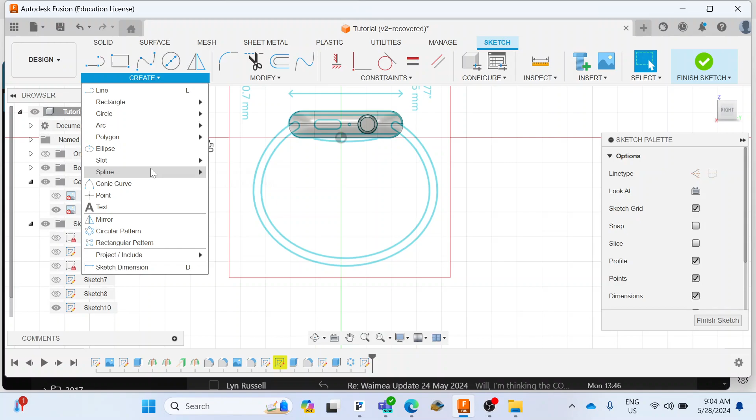The tool we're going to use for this one is the Spline tool. We're going to choose the Fit Point Spline. All you have to do is click points that fit the middle of the line the whole way along. Probably the more we do, the better it will fit.

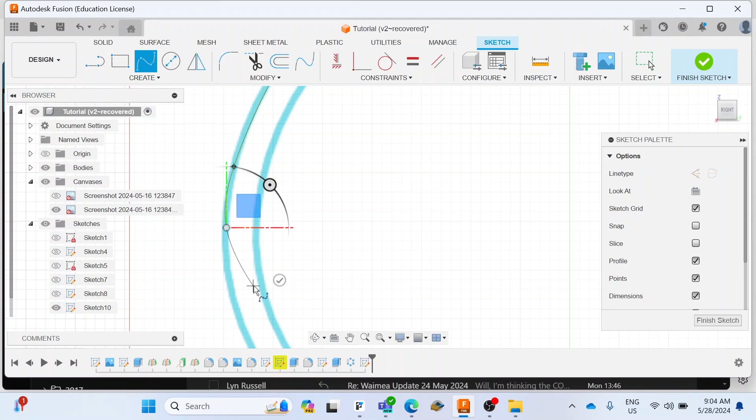Now to scroll across, I'm clicking the scroll wheel down. If you don't do enough points, you might find it doesn't fit the line very well, but this looks like it should work pretty well.

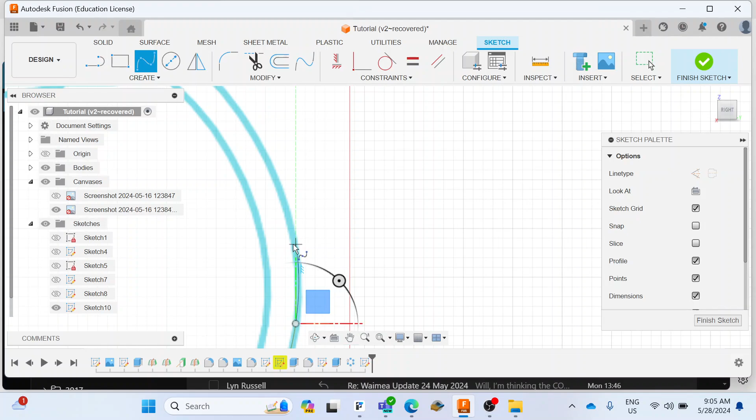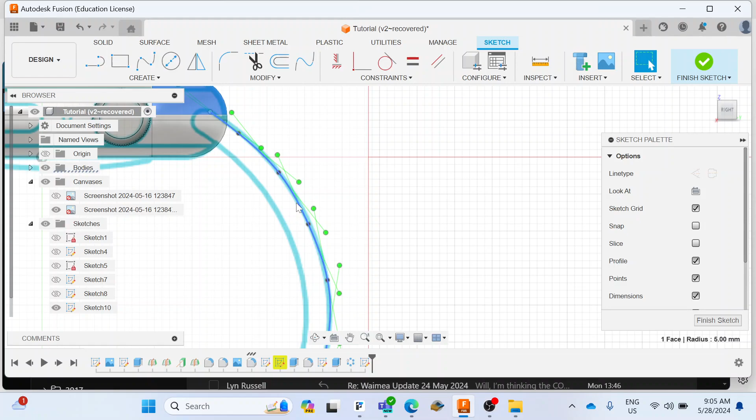Now to finish the spline, we right click and go OK. What we're going to try next is this line here. We're going to try the offset tool to see if we can make something smaller.

Sometimes the offset tool works beautifully. It may not work so well in this situation, but you can see we've created a pretty good line, pretty close to that. So we'll go offset, click on that line here, and we're going to drag it inwards rather than outwards, and that's done a pretty good job.

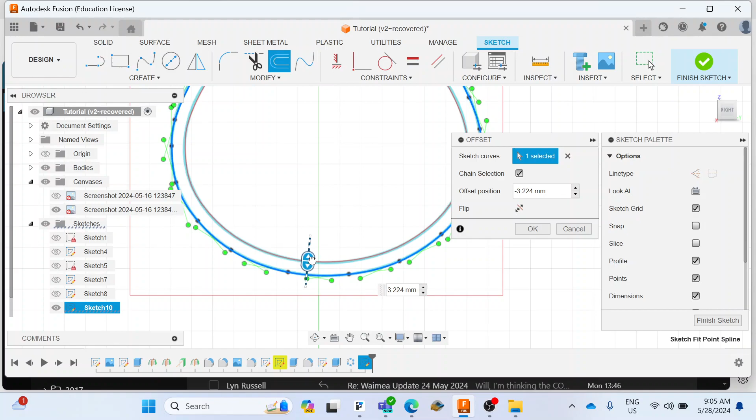Sometimes you might find it glitches out, but if that's the case, we just do that fit point spline again on the other side. So we'll go OK. Now what I want to do is just join the ends of the strap.

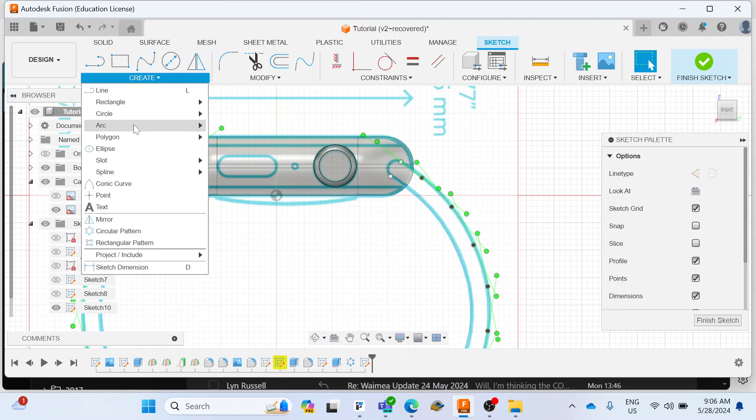For that one, I'm just going to create an arc, a 3-point arc. So just click the end of the arc, and then the other one. And that'll do. We'll do the same on the side.

What we might find here, this isn't too bad. To make sure this lines up perfectly, we can use the tangent line. So we'll just switch that off there to help visibility.

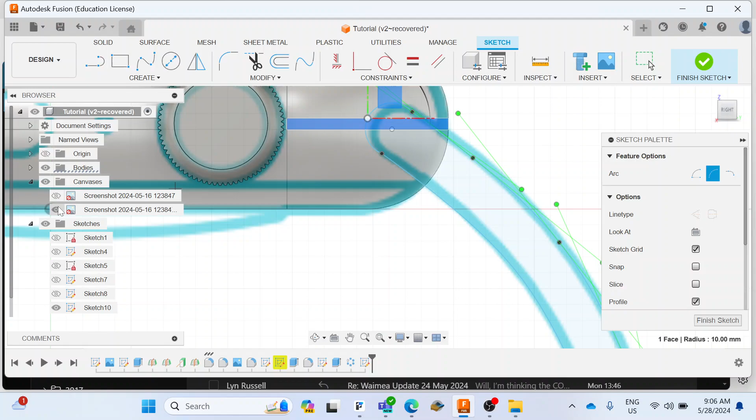So if we click tangent... that's not actually doing it. So maybe it's already tangented. Awesome. Okay, we'll go okay.

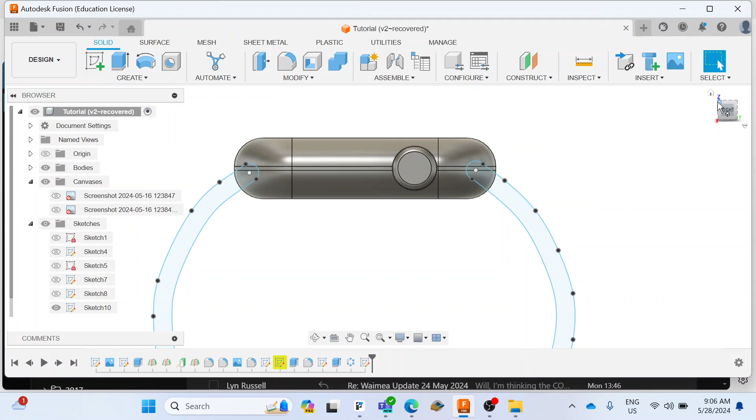So we'll finish our sketch. The next thing we're going to do is extrude that to make our strap 3D. You'll notice it's not in the right position, but that's not going to matter at all because we're going to end up trimming that sketch down.

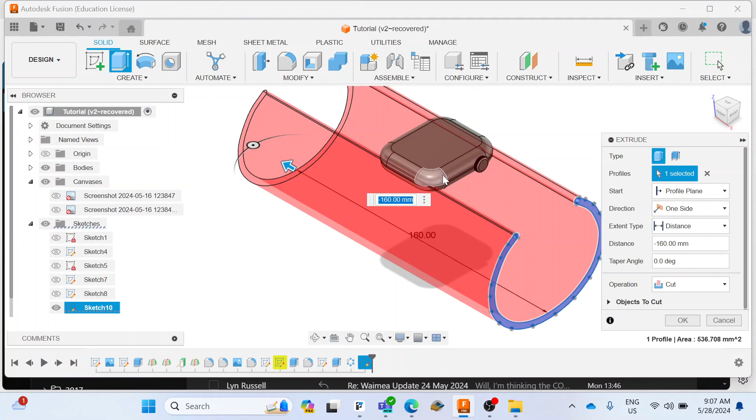So we'll extrude, and as long as it goes through the watch, that's fine. We don't want to make a cut at this point, although we will use that tool later on. So we're just going to go in here and go new body.

Then we go okay. So now when we look from the top, you can see that we've now got a strap that intersects both sides of the watch.

Now, if I turn this canvas on, you can see that actually the shape we want to cut out doesn't quite fit that design. So right back at the start of the project, we created those planes in the middle of the watch.

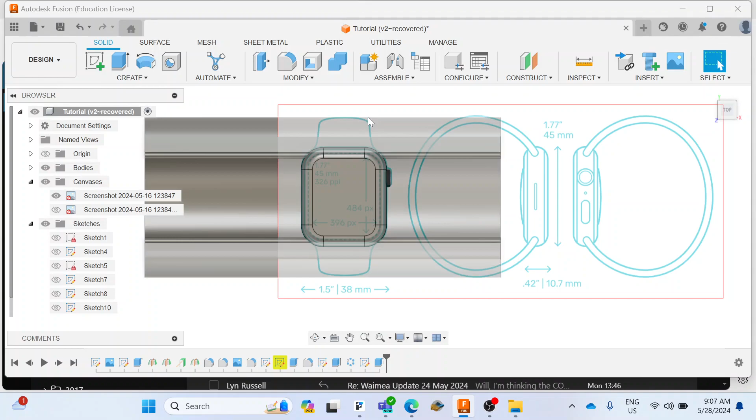So what I'm going to do is trim just a quarter of the strap off, and it should work beautifully for trimming off all of the strap. So what I'm going to do now is create a sketch on this plane.

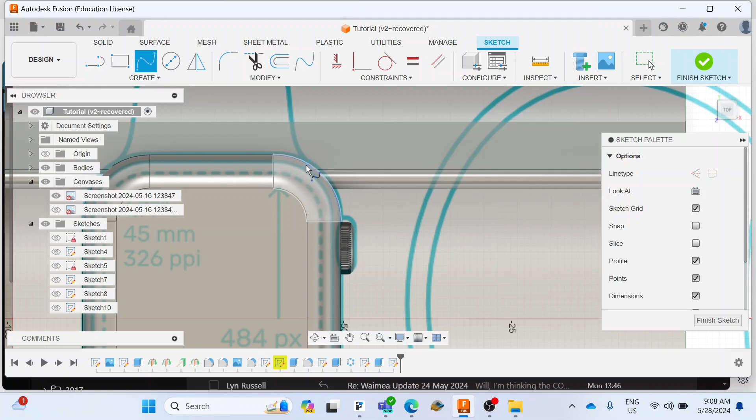And I think I'll use that fit spline tool again because it works so nicely. So spline, fit point spline. And I'm going to basically click here, and I might do a few more to make sure it fits the curve.

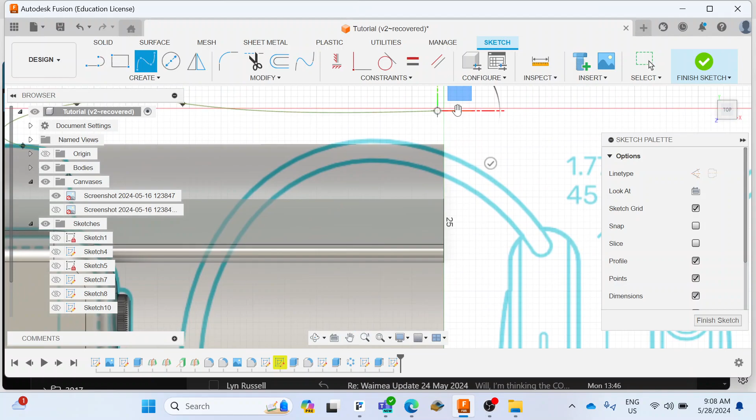Now I'm going to do a random thing, which is actually just me being lazy, but I think it will probably work okay. You'll notice I've gone just slightly over halfway in the watch, and we'll just go into just up to that surface there.

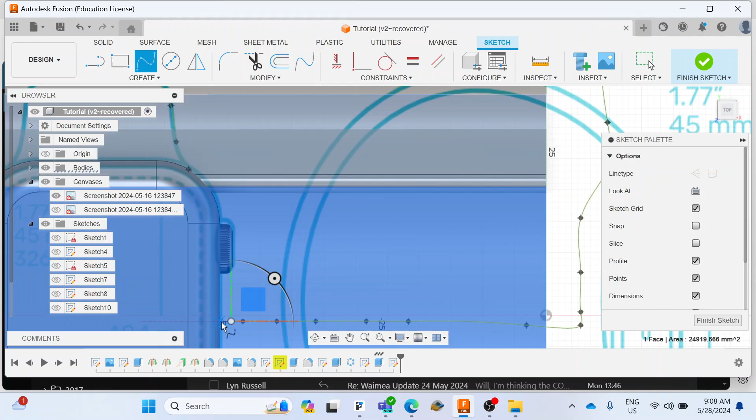Probably don't want to go there, so I might hit escape and undo. Do that again. Fit point spline - I'll just click on this because it was going to end up taking away some more of my strap than I wanted.

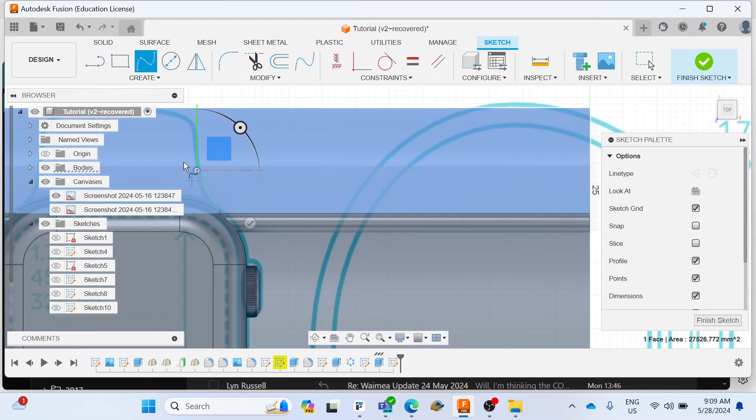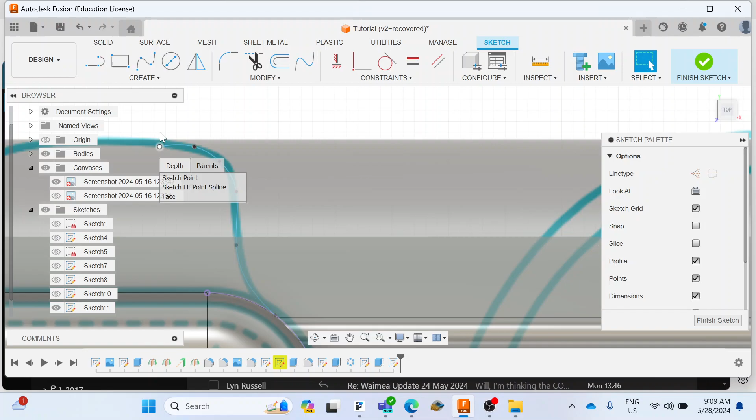Cool, so now we've got a fit spline. You can see that this is pretty good, but this point there is not quite right. So I can now drag these a little bit just to get them to behave a little bit better, because at the moment that's going to go too far in.

This is the beautiful thing with the fit splines, you can kind of drag them around, and you can see the more points you've got, the more control you've got. And I might actually make this go just to the outside of the strap to make our lives a little bit easier. And that will probably do.

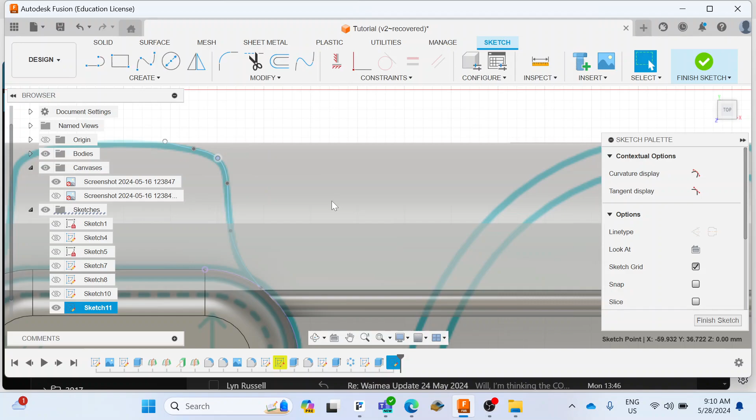Cool, now I'm just going to go straight line because it's going to make it easier for what I do next. And I can, as long as I go over halfway through the watch, it'll be fine. Cool, and I am going to go OK.

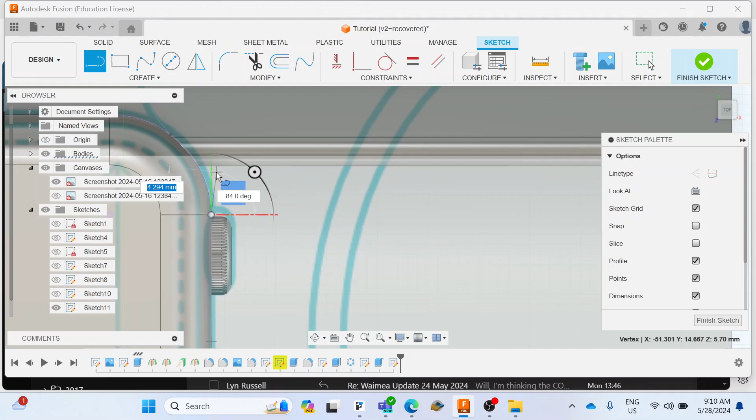And we've got pretty close to that shape there. You can sort of see it's kind of cut through half. So we'll now finish sketch. Click extrude. This is the shape we're going to do. And we're going to go cut.

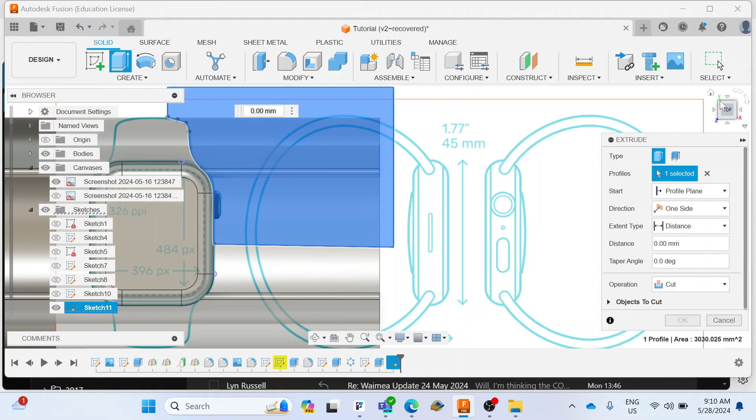But what we want to do, if I cut through everything, we'll change that to two sides. Then the annoying thing is that would then cut off the body, that would actually cut off the knob in our watch as well as the strap, whereas I'm actually only wanting to cut off the strap.

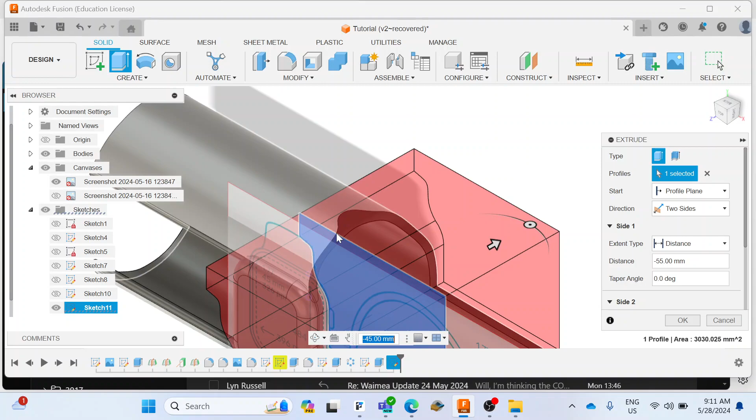So I can also actually see another issue here, which I hadn't realized. By cutting this little part at the top of the strap, it looks like I'm going to trim and create a slightly annoying shape. So I'm going to cancel that.

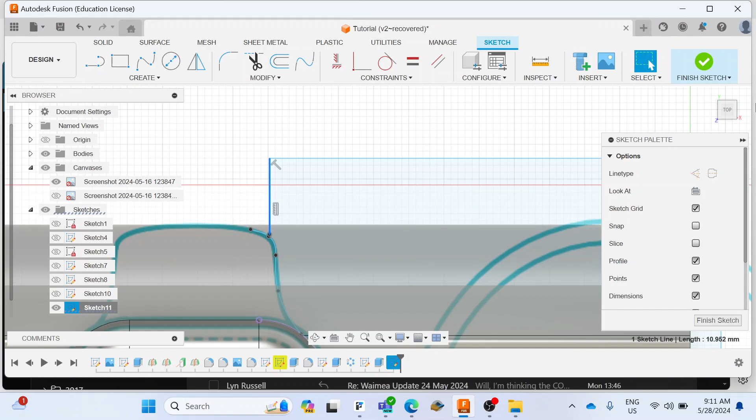And we'll go back to the sketch here, right click, edit sketch. And I'm going to slide this one across, and we might just go to here. Finish sketch. And we'll just drag that one there so it's done. Cool, that'll do. Then we'll have a look at it, how it looks again.

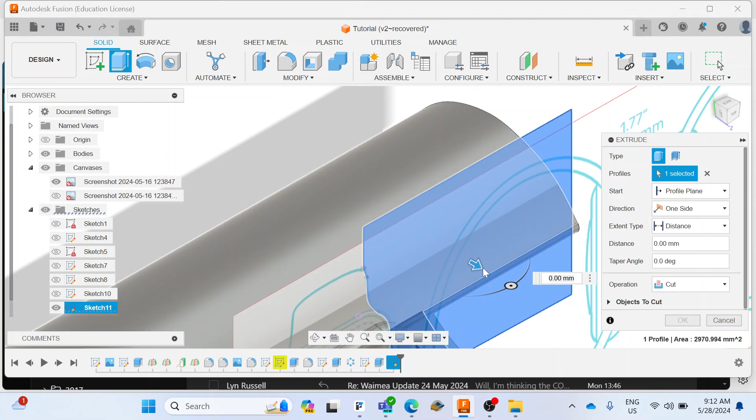This is the power of Fusion, that we can kind of edit things if they don't look like the way we want. We want to cut, we'll change it to two sides. That was better in that direction. But we've still lost - we've cut the knob off here.

If we turn the visibility of our bodies, I'm going to turn the visibility of the knob off. And I'm also going to turn off the body of the watch, just in case I end up snipping the watch by accident. I'll turn that one off there.

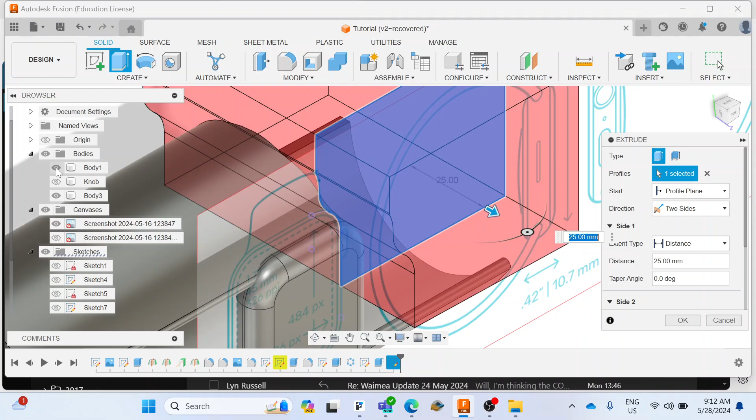So now I'm just trimming the watch. We'll now go OK. And you can sort of see that it's now trimmed the watch strap in a kind of an interesting way. So it's actually slightly glitchy here at the top.

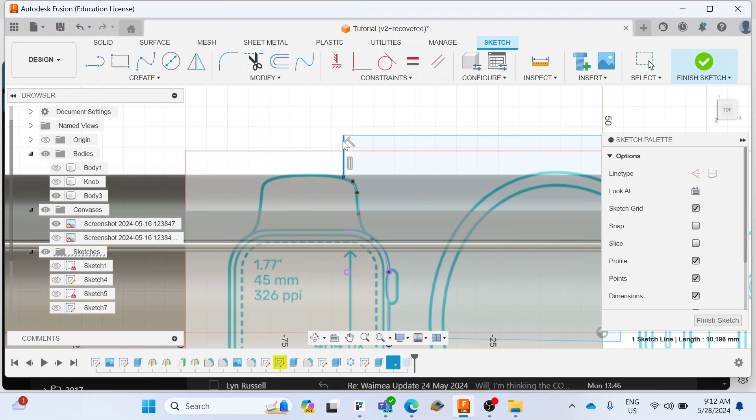So I could go back and edit that sketch and just roll it forward there a little bit, see if that's going to get me there. That'll probably do. We might put a fillet on that later to create a nice curve on it, but that will probably do. So the next thing I want to do is I want to use the mirror plane.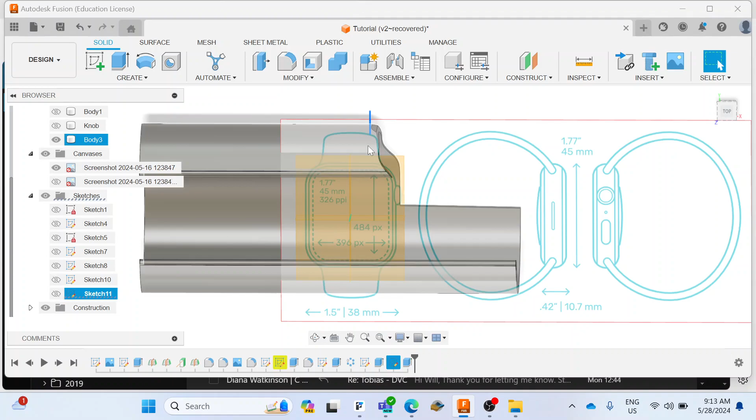So we're going to turn our construction parts on. So now I want to create that cut on all the four different corners of the watch strap. So we're going to go down to mirror, which is down here, mirror. And the object type I want to do is I want to pick features.

The object I'm going to do is that one, that cut. The mirror plane I'm going to select - it's going to let me zoom in - that one there.

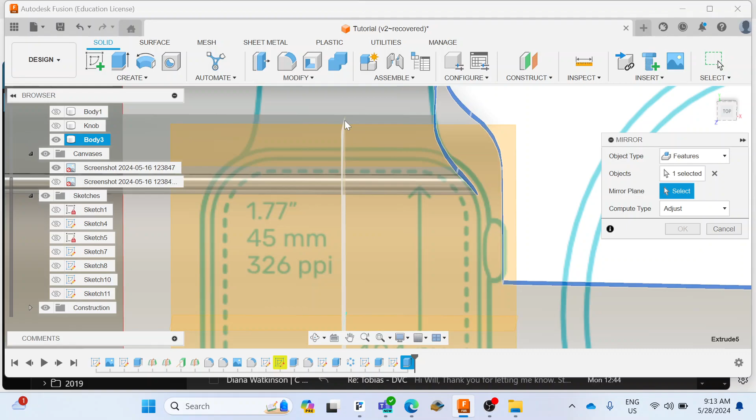And that's going to cut that side of the watch off as well. So we'll go OK. So we didn't need to draw that. And then I'm going to do that same trick again for the other half of the watch strap. So I'm going to go create and go mirror. Features still selected. I'm going to pick that object there.

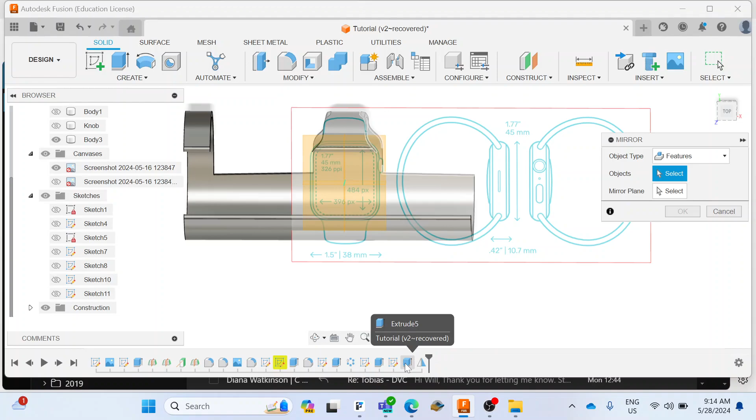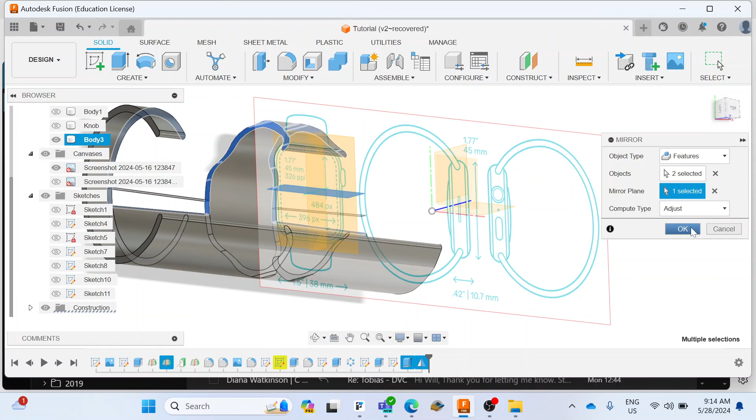And what we're going to do is we're going to select as, and we should probably pick that one there too. And then our mirror plane we're going to select is this one here. And so that should have now cut out the other half of our watch. Cool. And now you can see we've got our straps looking pretty good.

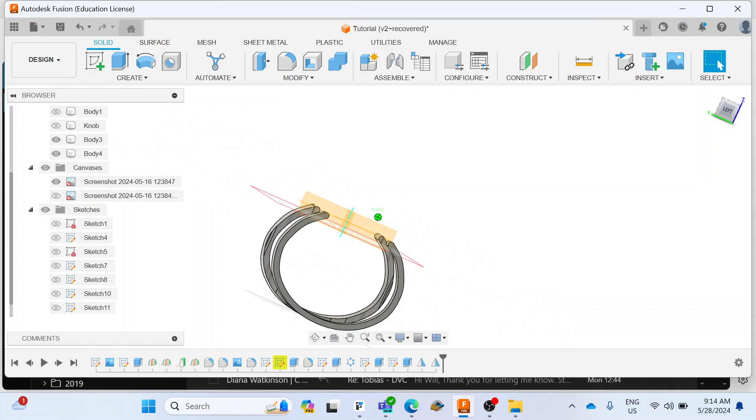Actually, it's something I hadn't thought about before. It's now cutting only the outside of the strap. So that's going to be a pretty easy thing to fix. We'll do that in a second. We might even use something like the split body tool to do that because it's kind of a nice fun one.

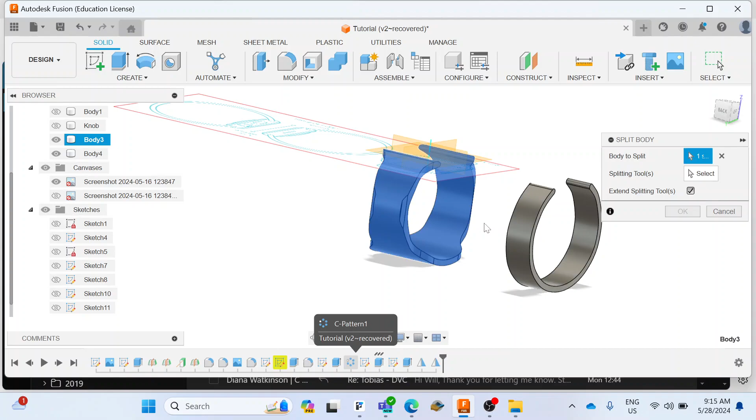What we'll go into here is we're going to go into modify and we're going to go split body. The body we're selecting is that one. The splitting tool we'll select is that one there. And that looks like it's going to work. Extend the splitting tool. Oh, has it gone? It's on the curve.

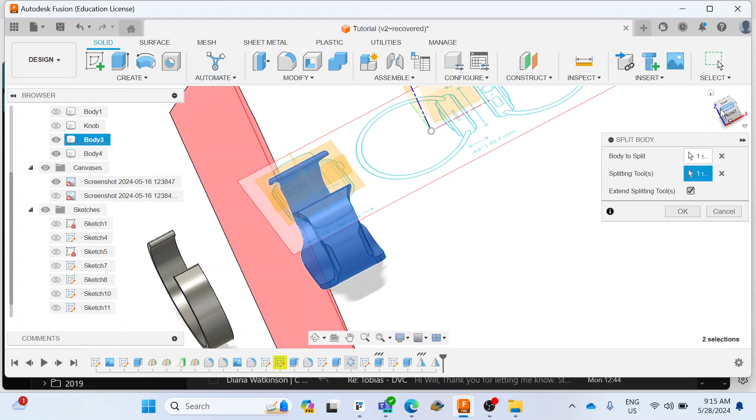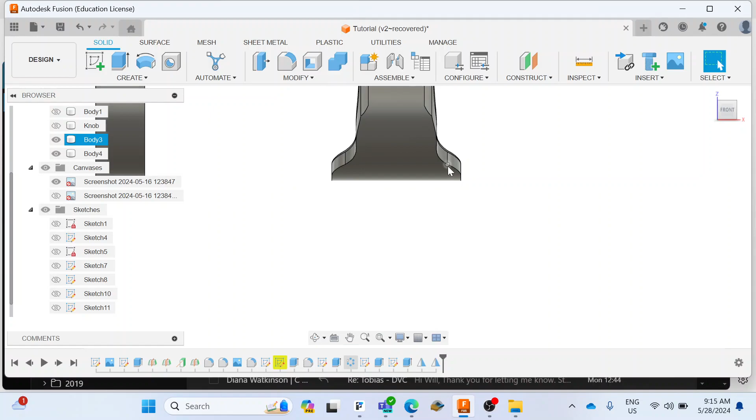We will cancel that one for the moment, and we'll come back and split it off in a second, because it looks like if I did that there, it's actually on a slight angle. So what we probably would do instead, if I can see if any of these are actually nice and flat to allow us to slice it off, which is probably quite easy, rotate it around in front. So essentially I want to just remove this part here.

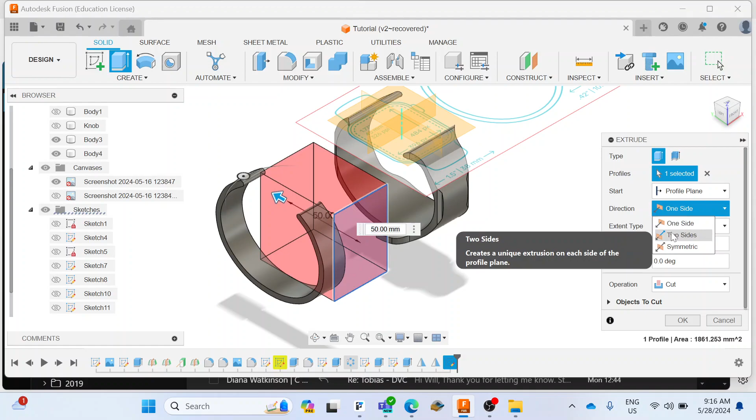So I can create a sketch on this plane, take a rectangle, and go here, do that way there, finish sketch, rotate so you can see in 3D what it's going to do. We're going to extrude, and we want two sides. Cool, and now that's cut off that on both sides. Go OK, and we'll use the mirror tool again.

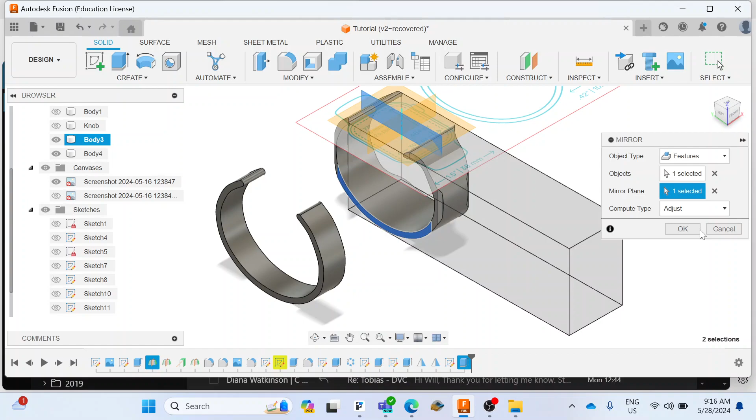Mirror. The feature we picked is that last one. The mirror plane we picked is this shape in the middle. And then we'll go OK. And now our strap is looking pretty good. We've still got some filleting work to do on there, but we can worry about that later.

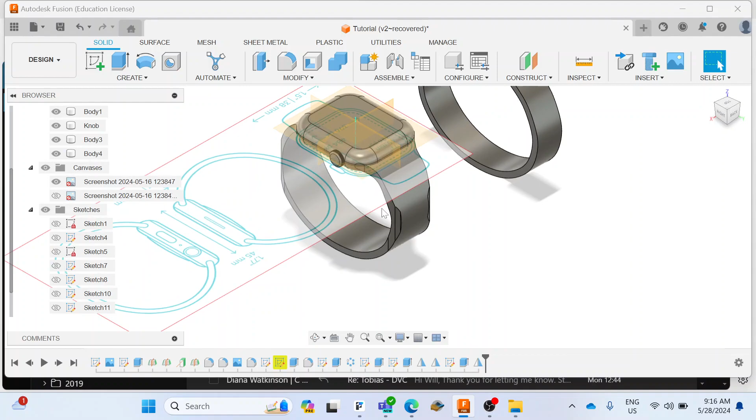So now if I turn the visibility of the knob back on and the body back on, we can see that our watch body and our strap actually overlap each other. So what I'm going to do here, I'll just turn the visibility of that off. We're going to use the strap as a tool to cut away from the watch body so then it fits together like an Apple Watch does.

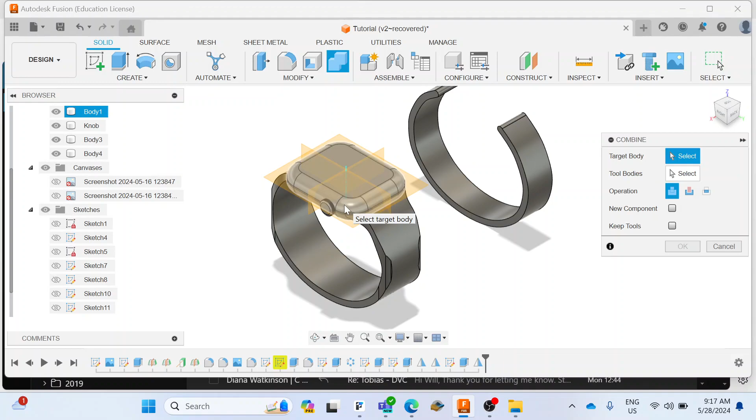So what you'll do here is you're going to go into this tool that says combine. Combine can also be used for cutting. So the target body we're going to cut away from is that body. The tool body is going to be the watch strap. We're going to cut, but we're also going to keep our tools so we don't lose that there. And that's as simple as it is.

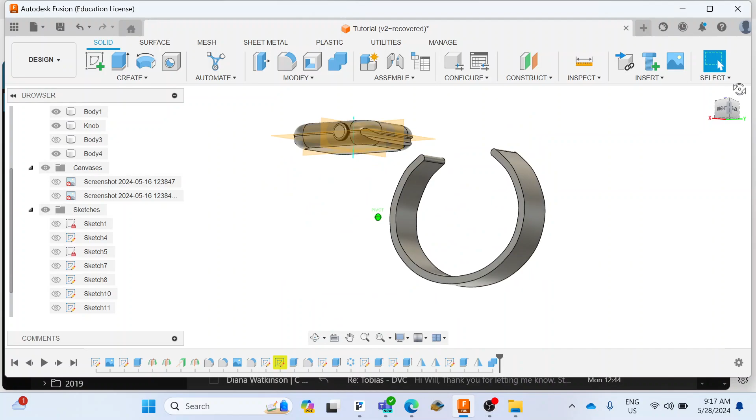You go OK. So now when I turn the visibility of this off, flip it around, you can see it looks just sort of like the way the Apple Watch strap goes in, but that it's all there sitting ready to go. We can also actually look at this body 4. We can just go and delete that one because we don't need that. Whoops, maybe not. We'll use that same technique we used to take away the bottom of the strap again.

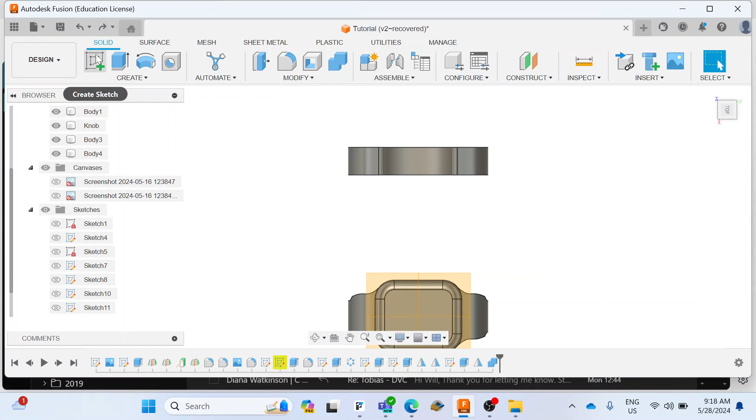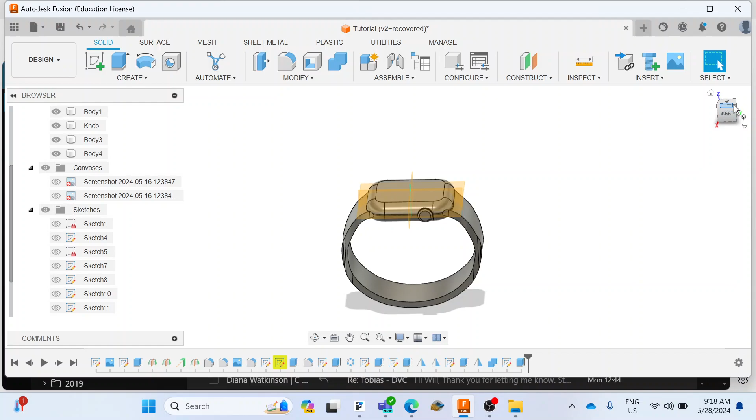So we can just create a sketch on this plane, do a rectangle, finish sketch, and extrude, two sides. Cool. And it's beautifully deleted that for us. That's us.